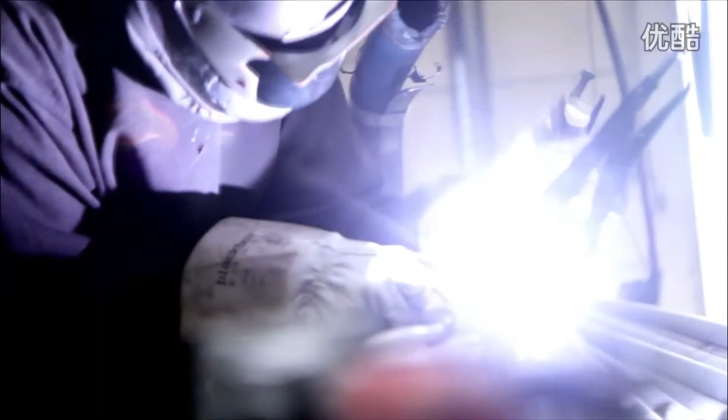Passion for boilers sounds strange, but this is a machine that creates steam, and steam creates electricity. That's why we are all sitting here. That's how the world is driven.

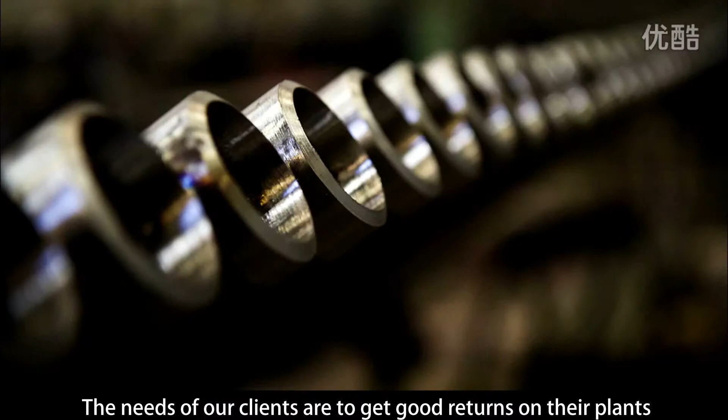The needs of our clients are to get good returns on their plants. A successful plant requires that you can run with high availability and high efficiency. The way we're achieving this is not to cut corners in our engineering. We have 25 years experience handling these difficult biomasses and can cover the full range of waste streams, from the very easy waste like wood chips over to municipal solid waste.

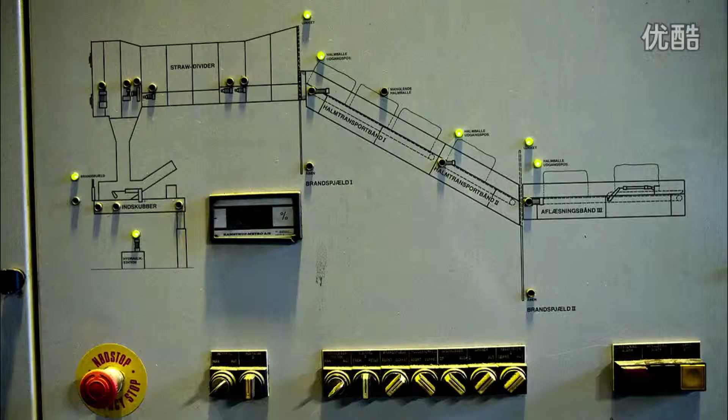DP technology is in constant development over a period of 40 years. We were one of the first to build biomass plants, and this gave us huge experience. Now, 22 years later, we are back in Odense, where we commissioned one of the most advanced plants in the world.

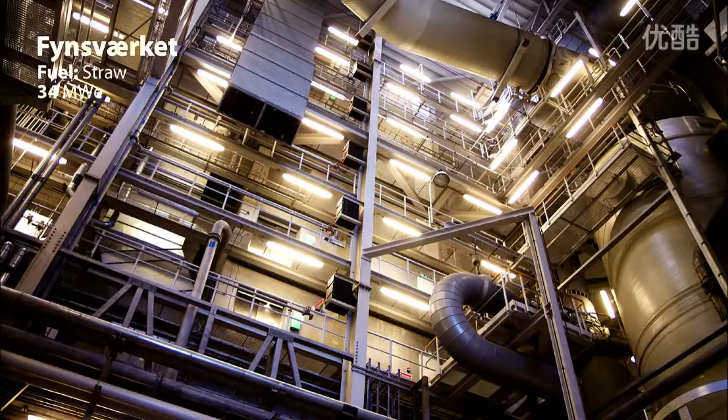Europe has the best engineering. However, that will not drive the biomass market to mass adoption. You need to have commercialization of products, standardization. There is nowhere in the world better at doing volume production than China.

National Bioenergy is the biggest biomass power generating company in China, even in Asia and the whole world. In the past 5 years, we only use the DP CleanTech biomass boiler.

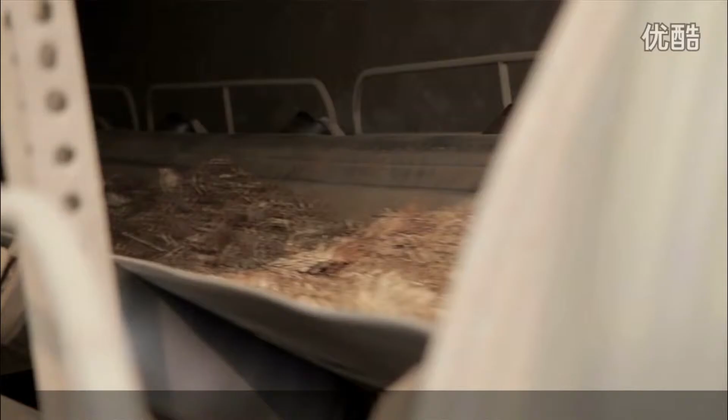Naturally, the DP solution can solve the energy problems in small developing countries where normally the biomass and waste is not used. It's a good opportunity for places like India or Africa to develop their rural communities, to have local power, and to not rely too much on imported fuel sources.

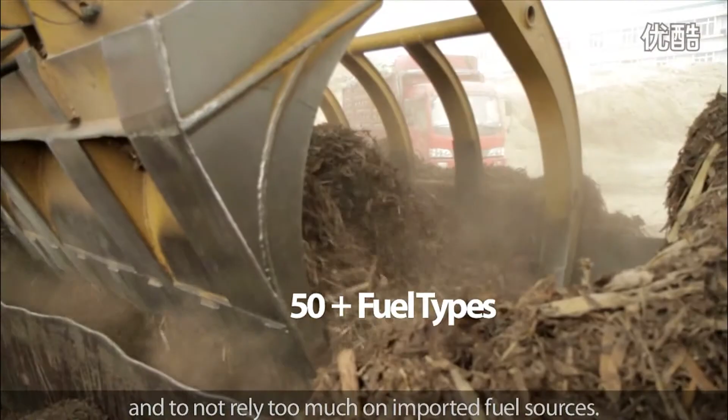We have more than 200 employees in 6 different countries. We have clients from all over the world. It's our mission to put everyone working in the same direction.

There is a lot of fuels not being used. We have different fuels, of course. We have waste, we have straw corrosive fuels, and we have normal biomass. But there still is a lot of corrosive fuel out there that nobody actually is using. What makes us different is that we are actually able to use corrosive fuels in our boilers.

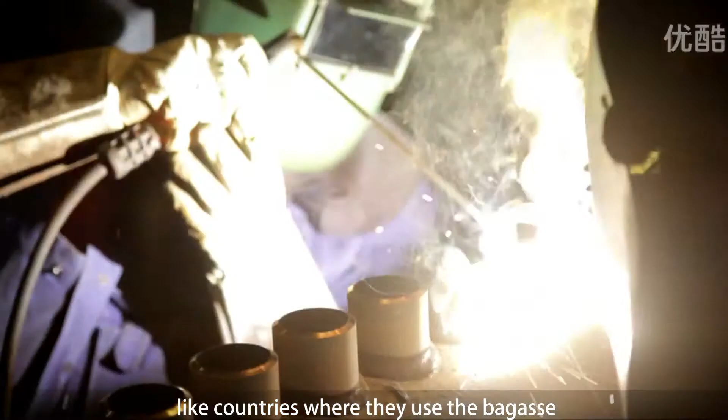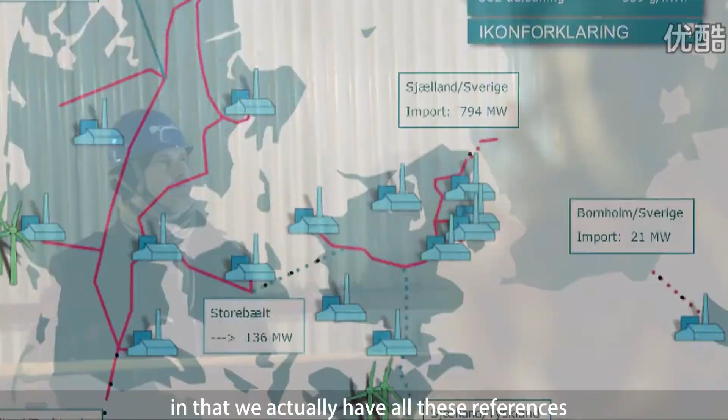We can see in some countries, like countries where they use bagasse boilers, normally producers of these don't have the experience with corrosive fuels. So we have a unique position here, that we actually have all these references with straw, which is a corrosive fuel. So coming into these countries, and that's many times in third world countries, we have the opportunity to go there and use these fuels. Fuel is the most important.